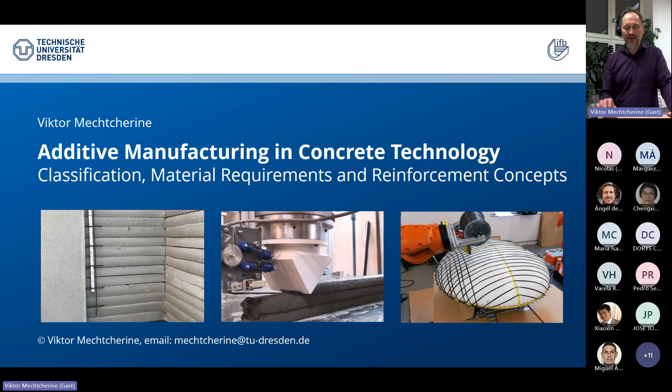Okay, let me start first with a motivation. What is behind this very dynamic development in the field? What are the driving forces? Often people start with geometrical freedom, which is, of course, interesting for architects in the first place, but also for the users if you want to go for some interesting geometrical forms.

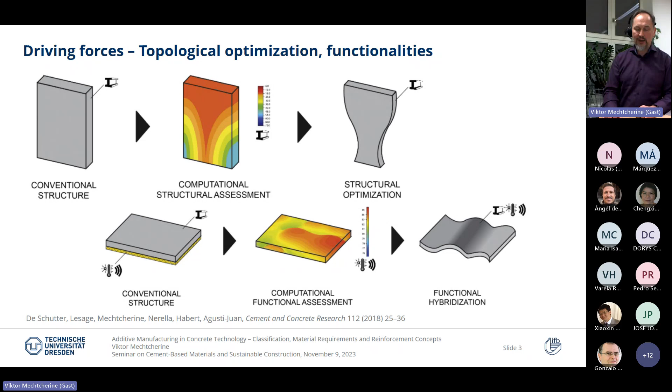On the other hand, we can use this topological freedom for topological optimization and also introducing new functionality. So basically, we attain the same performance with less material. This can be interesting from the point of view of structural behavior, but also with respect to construction physics and similar. So the next point is still about functionality and topological optimization.

The next point I want to emphasize a little bit more is productivity. Today we have a situation where productivity in construction is stagnating over decades already. And against the background of decreasing availability of skilled labor, it's quite a disaster. Here, introducing automation and digitalization, we can solve the problem for sure.

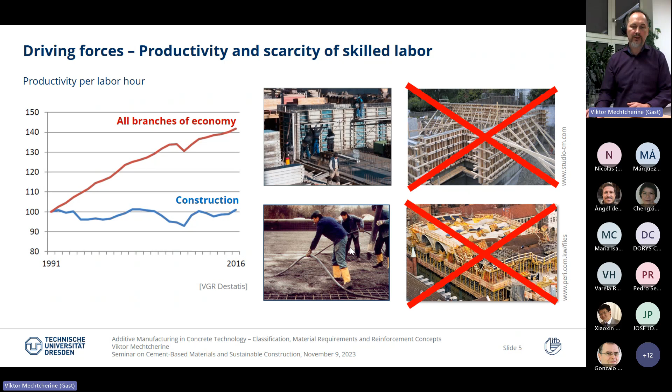What you see here are also examples of manual work. Talking about manual work, the erection of the formwork is one of the pretty laborious processes, but it's also about the use of material and, to some extent, the disposal of this formwork after use. This is what we can avoid if we go for digital construction using 3D printing and similar technology.

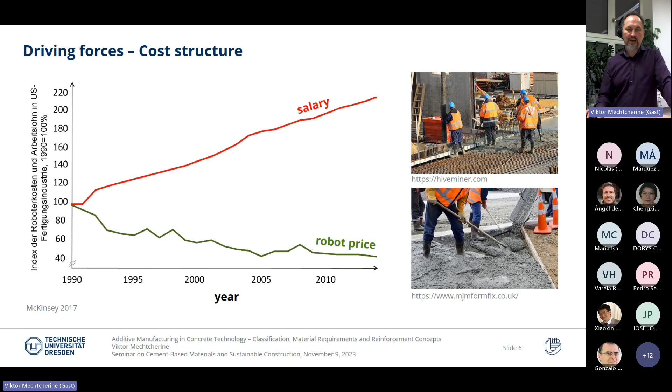And the final point here is the cost structure. So the salaries tend to increase over time, while the price for robots is decreasing. So it seems that using robots in construction becomes more and more interesting.

Finally, I want to address the situation with the data flow. What we already have as state of the art is a pretty wide use of digital planning tools like CAD and BIM, so that we have really a lot of data available from the planning process. It would be, of course, great progress to put this data directly into the production and fabrication of the structural members and structures.

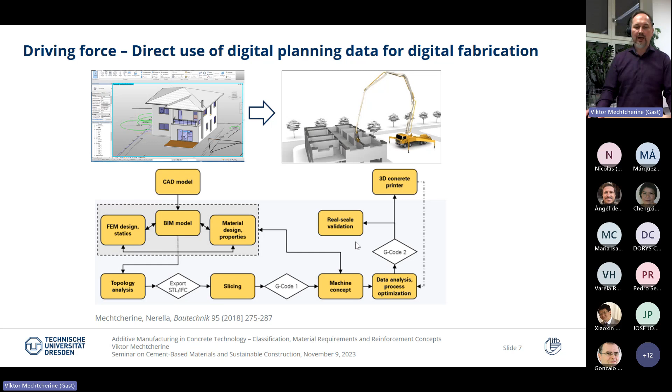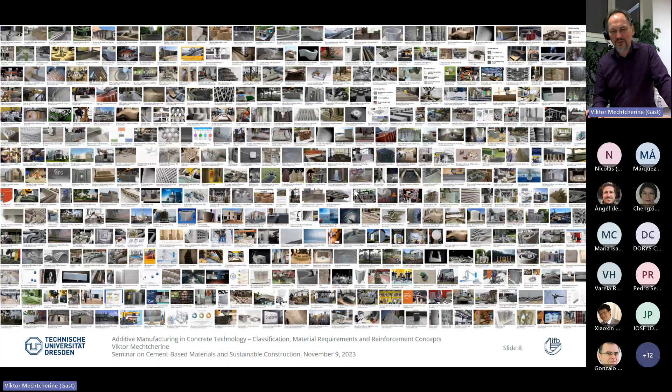Over the last couple of years, we experienced really dramatic progress in this field. You shouldn't try to read this slide, it's just an overview of what's happening across the world. It's a very fuzzy picture with quite a high challenge in how to navigate in this field.

This is why at Rilem we decided to go for some classification. This classification starts first with the definition of major operations, which can be assembly or process as such. And if we talk about additive manufacturing, this is a process.

It's a process where we shape the structural or non-structural part. And shaping can be done by different primary process classes. So what we're talking about with additive manufacturing is different from formative processes, for example casting with formwork, or subtractive processes where we produce a part and then take some material away by subtraction or milling.

So I will concentrate only on additive manufacturing, though there are also other digital processes which would be formative or subtractive. I'm talking only about additive manufacturing, which is also often called 3D printing. We have three major classes here, highlighted in blue: particle bed binding, material extrusion, and material jetting or shotcreting.

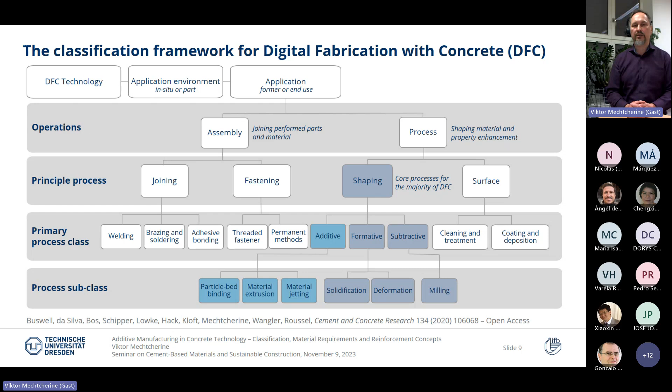All these approaches are very good and pretty mature nowadays already. However, material extrusion seems to be pretty dominant. So most of the labs and most of the companies in this business follow this process, which is why I will concentrate today on material extrusion based approaches only.

What we found in practice, however, is often this common case where we have a little bit of flow, some deformation of the filament upon deposition, but not very much. This situation cannot be described by analytical formula, but rather we would go for some numerical simulation.

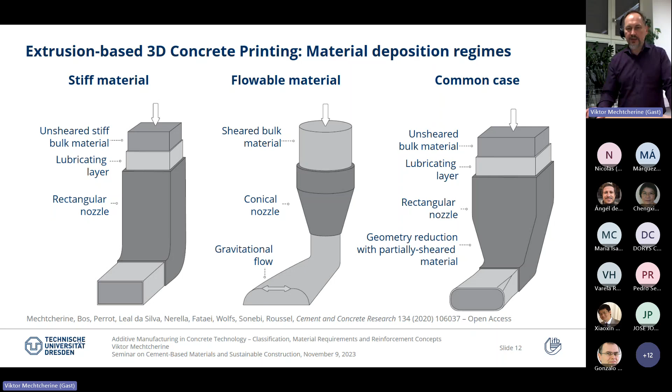It implies also that we can use very different materials. If we go to a very fine resolution and fine filaments, then we are limited to fine sand as aggregates, so basically we talk about fine mortar. It still can be called concrete, or fine-grained concrete, if it's in structural application, but basically with respect to the aggregate size, it's fine mortar.

I want to elaborate on it a little more. Going for larger filaments also means you have a quite pronounced increase in productivity, which is very important in construction. I have here a little graph which shows this quite clearly: going to larger filaments while keeping the same speed of deposition, you place much more material per time unit, and it's a quite important subject.

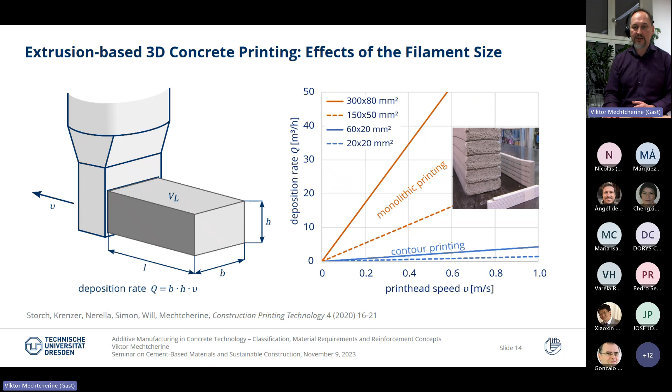And of course, using coarse aggregates and more or less regular concrete means you are very close to regular construction. It means you can stick to the existing codes also in design, maybe after some little modifications, and then all these issues with shrinkage, creep, elastic moduli, etc. are less of a problem compared to fine concrete.

So we had this thought a couple of years ago, and we developed a concept which we call CONPrint3D, or on-site monolithic 3D concrete printing. We got an award at Bauma. In a nutshell, it's about going for today's architectural and structural design, meaning sharp corners, straight geometries, massive cross sections. Nothing really very fancy, but it's kind of what is needed mostly on the market.

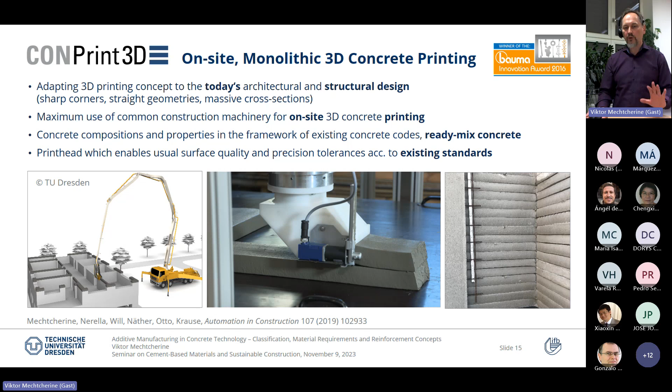Our concept also implies the maximum possible use of common construction machinery for on-site 3D concrete printing. And then we want to use ready-mix concrete, not some expensive material from the lab, but rather just order the material from the next ready-mix plant. This material should be, again, within the framework of the existing codes, then we spare a lot of trouble, using existing standards also for the quality of the work, precision tolerances, etc. It's also part of the concept.

And basically, we had a little video, which I hope will work now. Yeah, it works.

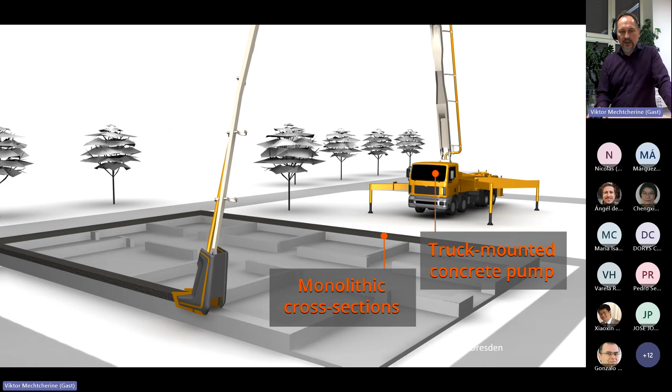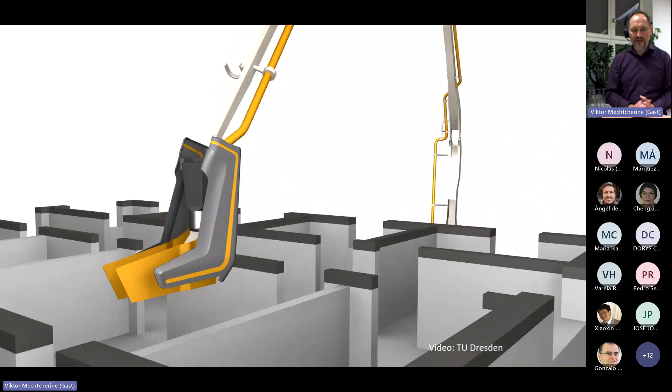Showcasing how it might be seen. We have here this mobile pump, and this mast works kind of like a robotic arm here. So this was the concept.

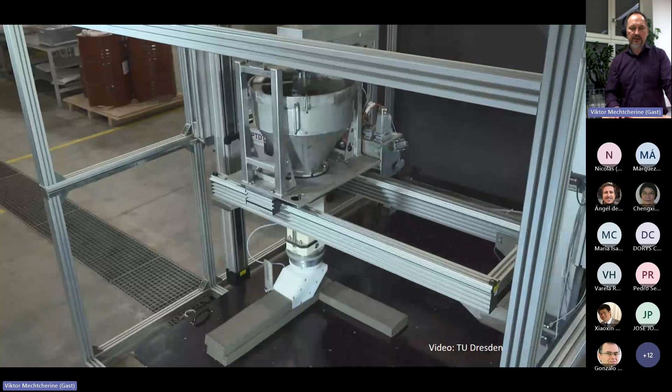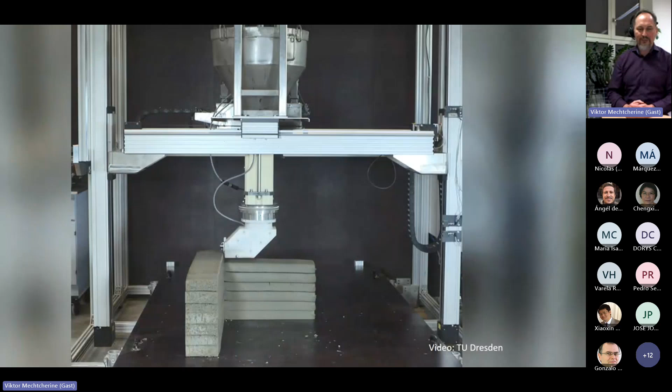We then started to implement this concept first in the lab using a gantry system to move the print head, which is pretty big in this case. In parallel, we noticed that a company here in Germany, Putzmeister, liked the concept very much. They talked to us, and based on this concept, developed a real machine, which we cannot develop in this size at the university—just too expensive. They call this machine Karlos, and they presented it just last year at the Bauma, six years after we got the award for this concept.

We were, of course, very happy that this idea came really into the practice of construction. This person, Venkatesh Nerella, was the first one to do a PhD in my group on 3D concrete printing, and logically enough, he is now with this company, pushing this technology forward.

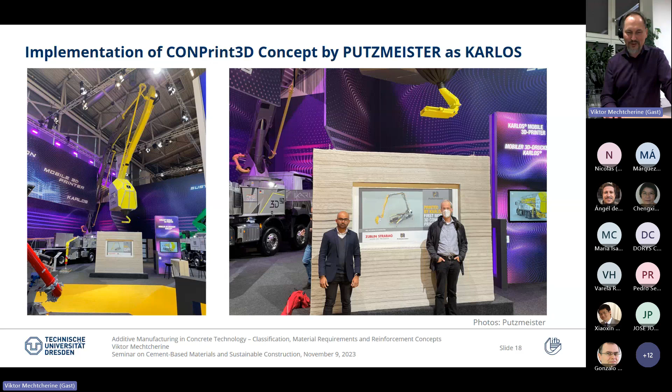I visited the site just a couple of days ago, and it's really very impressive how this machine works and has a really precise deposition of the material.

Now I want to come to a bit more detailed consideration of what we all need for establishing a technology like this. I'll stick to this large-scale 3D printing, but what I try to communicate is also valid if you work with fine filaments to a great extent—the difference is really minor, because it's always about the same principles and more or less the same approach.

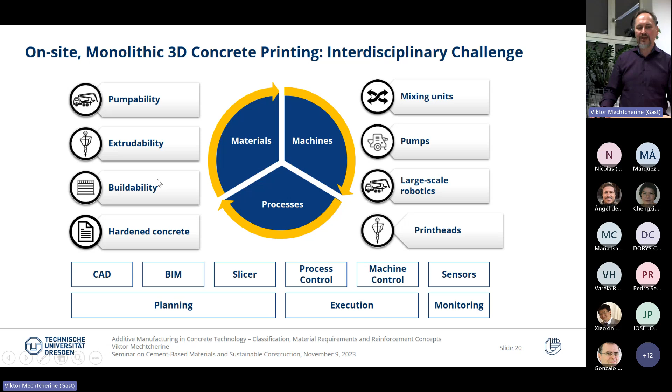So you see here the different competencies we need: materials and machines, and also steering of the processes. I will not try to cover all of this—I will stay on the left side, where I also have particular competence in materials. So it will be about pumpability, extrudability, buildability, and also properties of the hardened concrete.

This is what you see here. You first need to pump the material. Then you need to extrude the material—meaning the material should flow out of the nozzle with a particular speed and have a particular shape after it leaves the nozzle. Then you should be able to place more material on top of the deposited layer. We call this buildability—the ability of the material to carry this additional load from the upper layers without too much deformation.

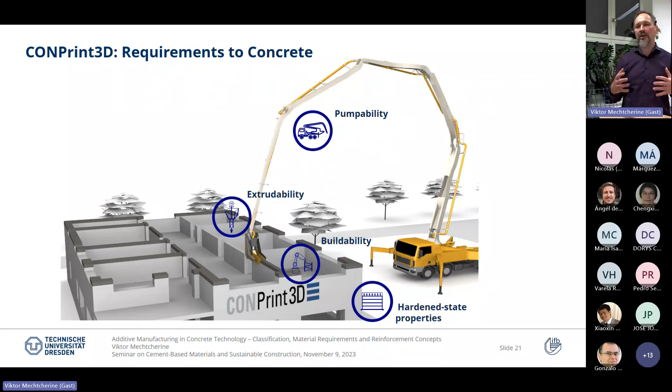And then finally, of course, we also need the properties of the hardened concrete, which we consider in the design. Basically, buildability and hardened concrete properties represent a smooth transition from hardening concrete to really hardened concrete. So we have more than just one stage for structural design—we should also design for the buildability, or for this stage of the production.

Good, so let me go through these particular steps. So, pumpability—actually we know pretty well how it works, but still pumpability needs attention. You should consider that it's mostly about the heterogeneous nature of concrete. So the concrete is heterogeneous.

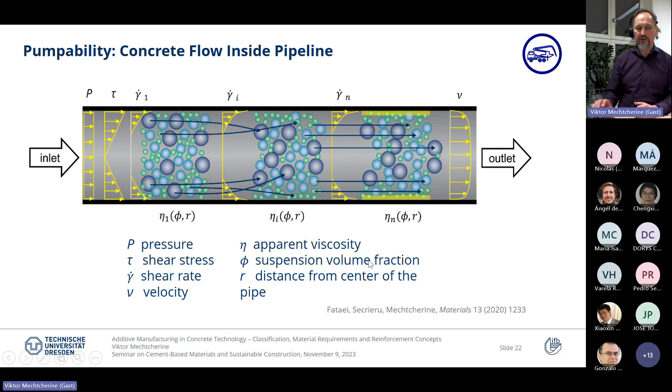Nicola explained this very nicely. In this case, moving concrete through the pipe leads to some segregation—we have formation of a lubricating layer in the vicinity of the wall. This means that this region, which is mostly sheared, also defines the movement of concrete within the pipe. So to describe this movement, we need to know the properties of this lubricating layer in the first place. It's not so much about the rheology of concrete as such, but rather about the rheology of the lubricating layer.

We developed a technique to assess this situation. It's not a usual rheometer—it's a so-called SLIPER, a sliding pipe rheometer, which mimics the behavior of concrete in the pipe.

So basically it's a piece of pipe which moves, and concrete actually doesn't change position in space, but it kind of also moves relative to the pipe. So technically it's the pipe which moves, but for the concrete it's like it moves through the pipe. The situation is similar, and what you measure here is actually the resistance to this movement.

There's some sensor placed at the bottom of the concrete column, and you measure the speed with which the pipe is moving. You can change the speed by attaching more and more weights to the pipe. So basically what you get is a relationship similar to what Nicola showed in his presentation.

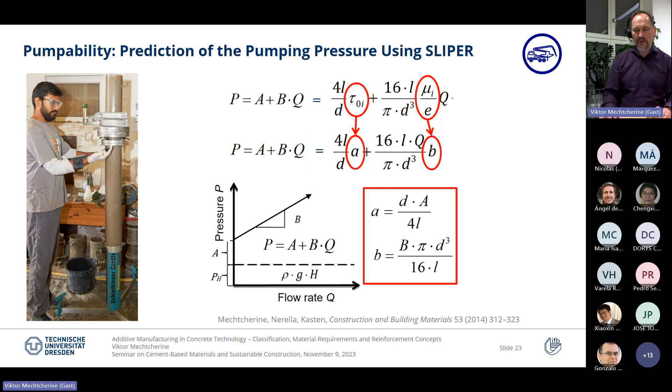The next point is extrusion, extrudability as a property. Since we work usually with screw extruders, I will concentrate on this. It's really not easy to predict what happens in the extruder. We do not have an analytical formula for this kind of relationship - what force is needed to move this complex material in the screw extruder.

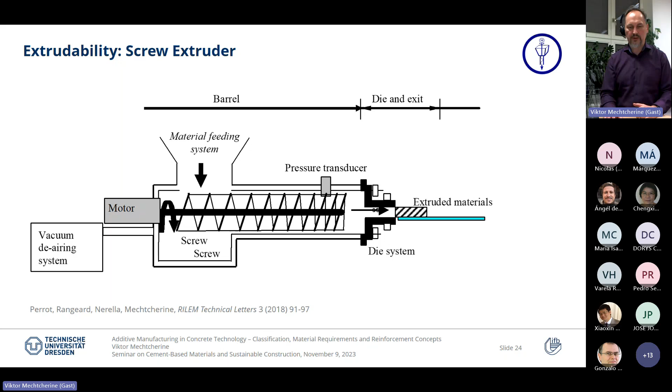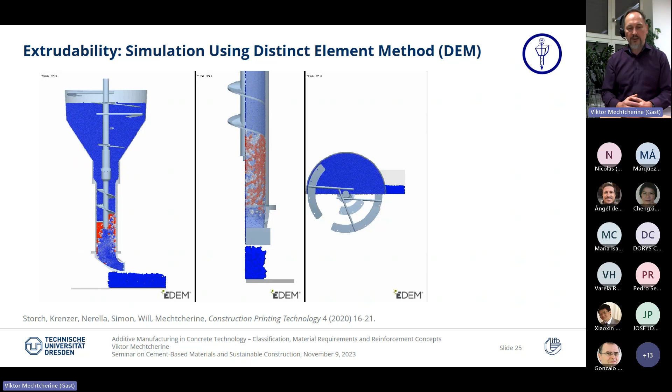What we can also see is that we get some impression of how this tool we use in the printhead to deliver the material actually interacts with the material. This is a very good, feasible approach, also to improve the designs of the printheads and other equipment needed for 3D printing.

Here also a little demonstration that we can simulate how well the deposition rate of the material is coupled with the movement of the print head. On the right hand, it seems to be a good coupling, and the other two examples - too fast, too slow - don't bring a good result.

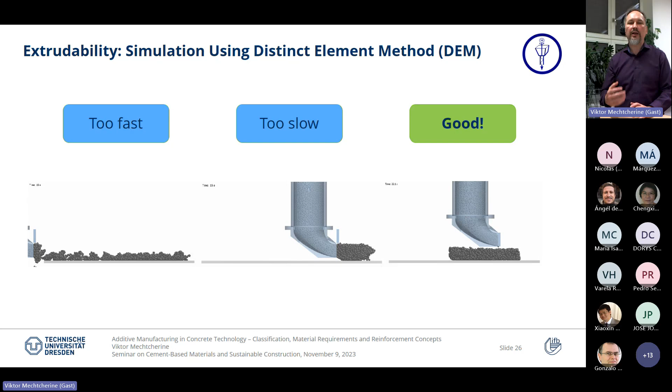This is really important - that you always adjust the movement of the print head, which is performed by some operating machine. It can be a gantry system, a robotic arm, or whatever else, with the delivery rate of the material. Then extrudability as such.

First we are interested in the quantity of the material which is delivered, and the best way to measure it is just to print some material, not produce an actual structure, but rather print it on a scale, and then you have the quantity of material per time which is delivered.

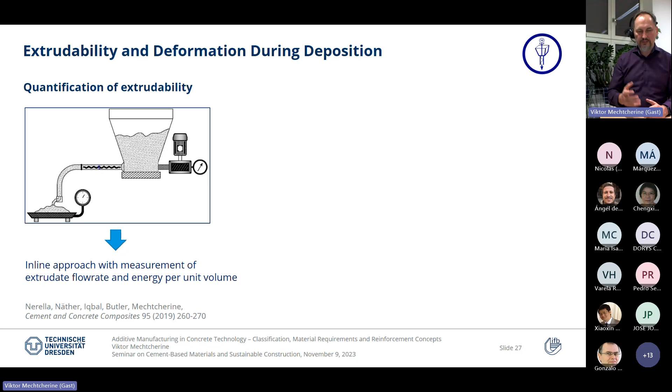Of course, you can also measure geometry, and with assuming some specific weight of the material, you can come to the same result. On the other hand, you are interested in the geometry of the filament after deposition.

Basically, as long as the yield stress of the material - a dynamic yield stress in this case - after deposition is higher than the density multiplied by the acceleration of gravity and the height of the deposited layer, then you will have no deformation. In any other case, you will have deformation of the material.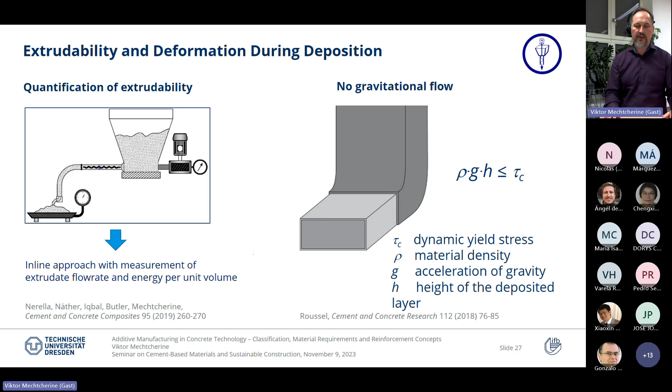If we have deformation of the material, either it's very flowable, and you can use an analytical formula, or it's not very flowable but also not very stiff, and then it should be a numerical analysis if you're interested in predicting the shape of the layer, which is interesting in many instances. I will not address this.

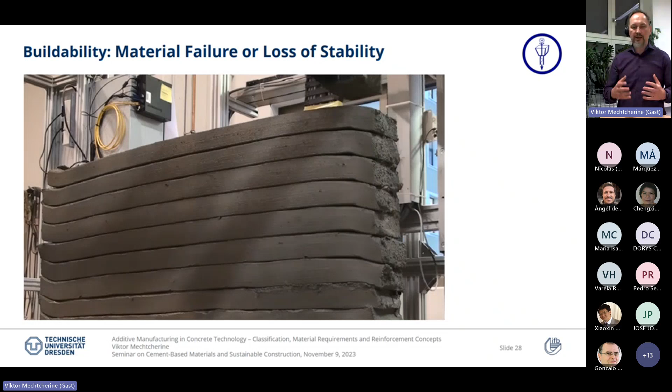I will go to buildability. Buildability, I repeat myself, is the capacity of the material to carry the load of the upper layers coming as we progress. And this is what we do in the lab.

We wait till this all fails, and you see a little bit surprised expression on the face of my colleague. Well, he shouldn't be surprised, because we actually printed on purpose until we reached this ultimate state, the failure, and then from this measurement we can test if our prediction of buildability is valid or not. So we need this kind of experiment where we have failure.

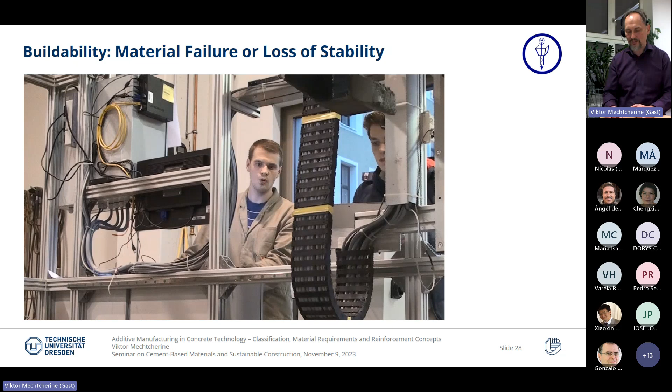So in this case, material failure is due to flow of the material in the first one or two layers. Another scenario is loss of stability, where due to elastic deformation the wall becomes higher and higher, you have stability issues. I'm really talking about elasticity, even if the material is not fully hardened but has some elastic properties, and it's decisive here. Of course, it can also be a mixture of plastic deformation plus loss of stability in addition. So here again we need to describe the material's resistance.

What would be the development of this resistance in time, because putting layer after layer, we have progress in time. So the time runs, and the material we deposited first also develops in its properties. I refer here to the previous presentation by Nicolas Roussel, who described the phenomena occurring in the material.

So basically, to describe this we use an approach like described here. It's very similar to what I showed for one filament, but in this case it's the height of the growing wall, not just of one filament, and it's also a function of time, as shown here. I hope you can see my cursor.

On the other hand, we have the initial yield stress, and then some development in time which depends on the thixotropy of the material. We can use a formula suggested by Nicolas Roussel or by Perrot, depending on which time interval is of interest. At the beginning, this development in time is pretty linear.

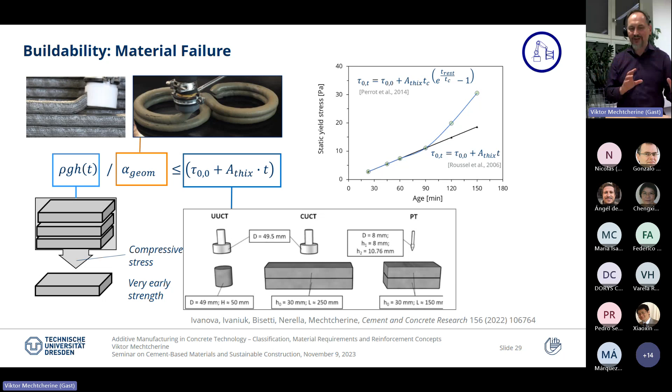To derive these properties we need a robust approach. You can try a rotational rheometer method, but not in the usual regime—really start very slowly to capture the quasi-static properties of the material. Or you can go for a penetration test or uniaxial compression test, again on fresh material, so it's a compression test performed on fresh material.

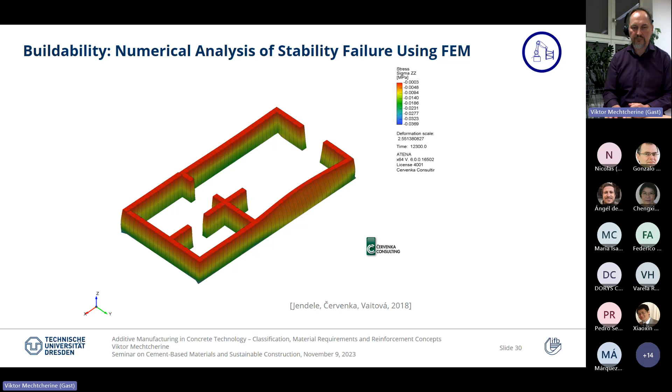When you have a more complex geometry than just a simple wall, for which analytical formulas are good enough, then numerical analysis is a good choice. In this case, finite element method is quite a good choice.

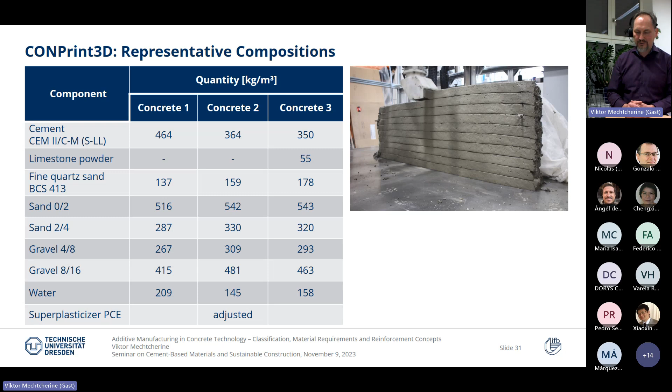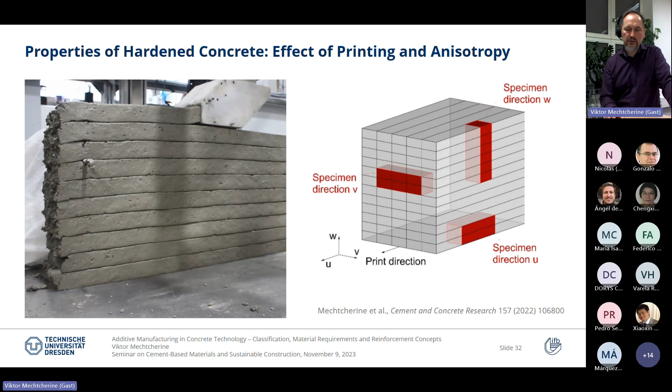After producing some walls, we also want to test the properties. I want to emphasize that due to this layered structure, the properties will not be the same in all directions. This is why we need to take specimens in different directions, and also test them in different directions, and we see here some effect of this direction.

We have the cast specimen on the left as a reference, and you see that specifically if you test flexural strength or tension, applying the force perpendicular to the joints will result in slightly, or sometimes considerably, lower values of strength compared to loading parallel to these layers.

Okay, if I still have a couple of minutes, I would like to present a concept, or rather an overview of concepts for using reinforcement. Gonzalo, please stop me when I reach my time limit. I can stop anytime. Good.

Reinforcement is very important, and again we put our heads together in a RILEM committee on 3D printing and developed this scheme. We recognized that the key criteria for sorting all available and future methods into some categories is the time of reinforcement integration.

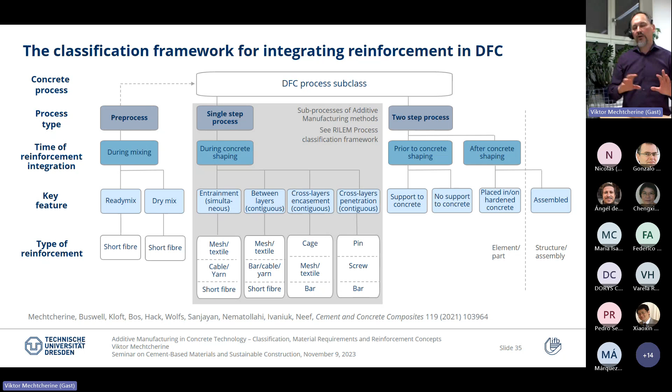Then we have a two-step process. These four were a one-step process where the concrete is still in a fresh state and we process the reinforcement in parallel or simultaneously. If we separate production of concrete and reinforcement, we call it a two-step process. Then we have two options: we put reinforcement prior to concrete shaping, or after concrete shaping. I will show you an example for all these approaches.

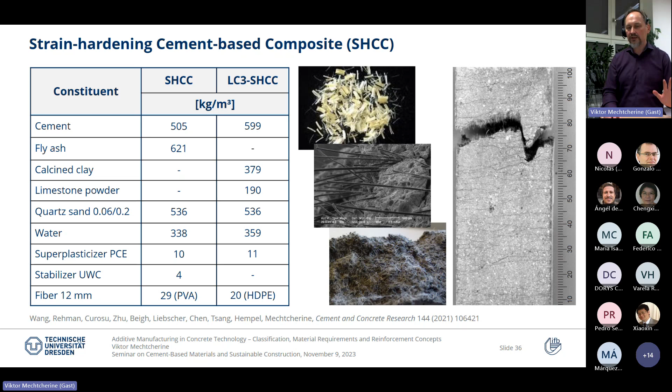I will start with short fiber. Nowadays we have really good options to produce strain hardening materials, which means they are really good for structural design. You need to use specific fiber to achieve that, and the matrix composition is also a bit specific. It's called SHCC. It's not a new concept as such, but what is relatively new is the use of these materials in 3D printing.

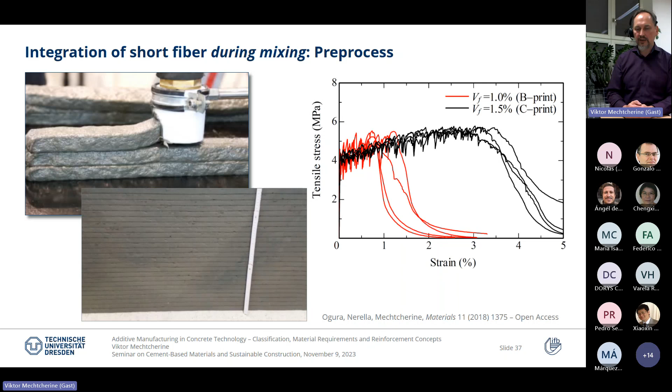We started this work a couple of years ago, and the first publication was by our guest from Japan, who spent one year in our lab, together with ourselves. Then, back home, Dr. Ogura, after rejoining his company, indeed implemented this technology.

What you see here is production of an integrated formwork, made without any further reinforcement other than short fiber. The benefit is you can transport these pieces, which are pretty filigree and have very thin walls.

You can transport them to the construction site, you can mount them, and there are no issues, no danger of cracking or falling apart during mounting. No problem. They can also carry quite high loads from the flowable concrete filled in here, actual self-compacting concrete. And also good news, it's a really protective skin, very well protective material, because it's really crack resistant.

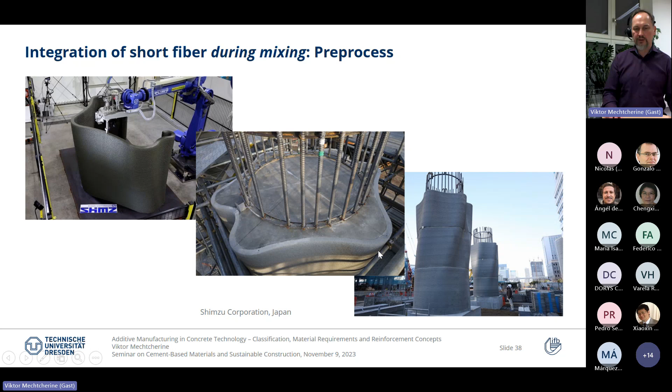It's very tough, and you see you combine here nice geometry, which is also of structural importance, with advanced technology. We use this approach also for producing some fancy shells made of these kinds of panels, or rather elements which are flat. So it's all linear geometry, but by putting these elements together you can produce all kinds of curvatures.

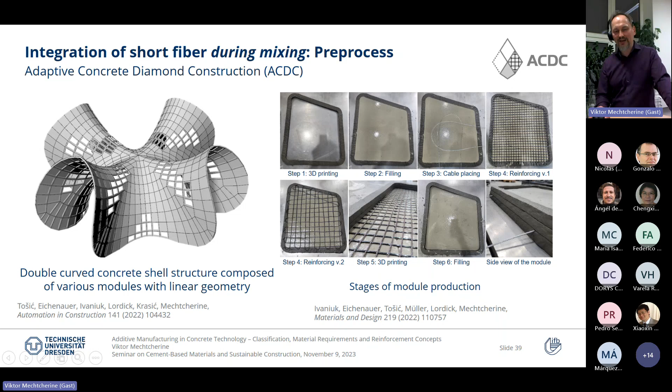This is a multi-step process. We first print the edge, then we fill in some flowable concrete, put in some reinforcement, either textile which is already ready-made, or we deposit the yarns and produce textile in situ, and then some steps can be repeated until we complete the production of these elements.

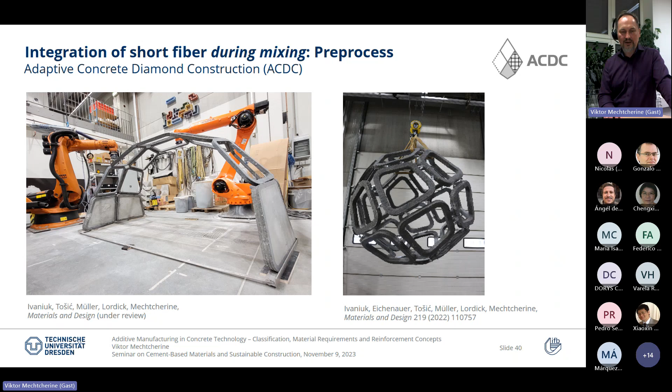So we have one or two demonstrators to show already, and this is ongoing work. Some publications are submitted and you can read them soon enough.

Now I come to placing reinforcement prior to concrete shaping. This would be a two-step process. The concept we suggested for steel reinforcement is: first a cage of reinforcement is placed, then in the middle you have a very thin mesh just to control the material flow, and then you deposit layer after layer from one side and then from the other side.

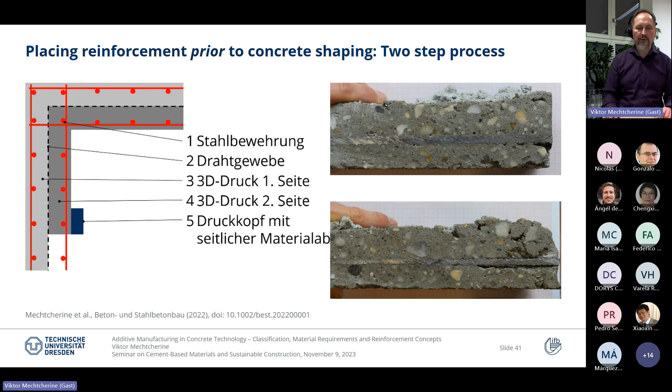We tested this approach in the lab, so it seems to work. It's not always great, specifically at the beginning of the printing process we have some issues enveloping the reinforcement nicely, but in general it seems to work. Another approach is also placing reinforcement prior to concrete shaping, but in this case it will support the concrete, whereas in the first example it doesn't support concrete—it stands for itself and the concrete stands for itself.

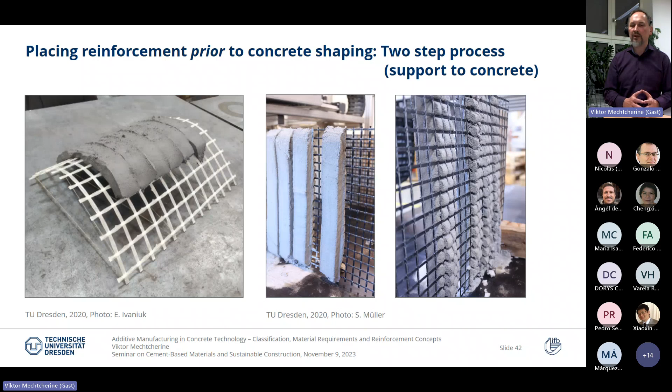Here we see a fun example of reinforcement placed vertically and shaped, and we can deposit concrete on it. In this case, the shape of concrete is really defined by the shape of the reinforcement, and this is a major distinction to the previous case.

Another concept, also a two-step process, but first concrete, then reinforcement. In this case, we first print the core of concrete without any reinforcement. But between the layers, we place pieces of metal, pieces of reinforcement. They cross the filament and help us accommodate meshes, which we just hang on them.

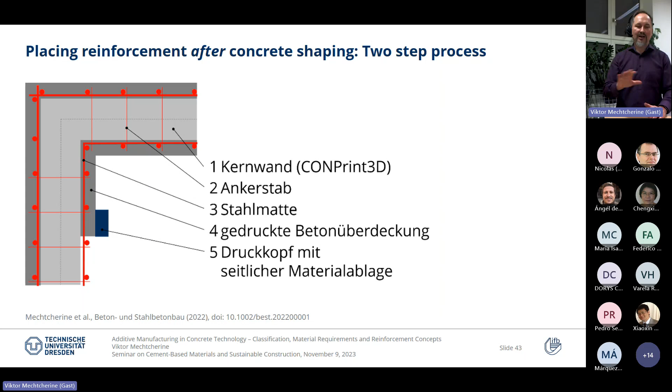Then it's more or less the same process we use in repair, when we bring strengthening or additional layers of reinforcement onto the existing structure. So again we use the print head to deposit material layer by layer, starting at the lower position and coming up step by step. So this is how it looks. Well, in this case, it was made by hand.

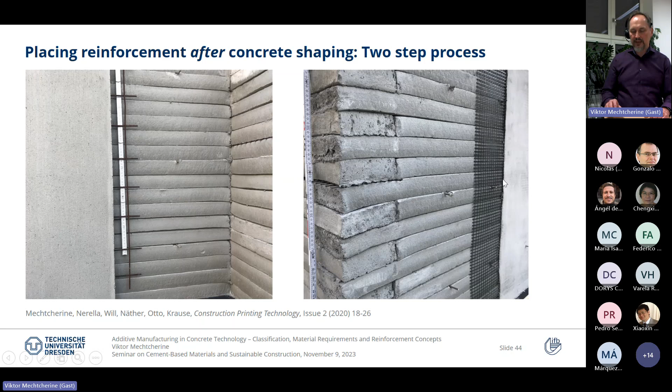But at the moment we are moving forward. We have some photographs, not looking as nice as this one, so I'll show you the better ones we achieve next time. And actually, it doesn't need to be steel reinforcement. We can also apply textile meshes or something similar.

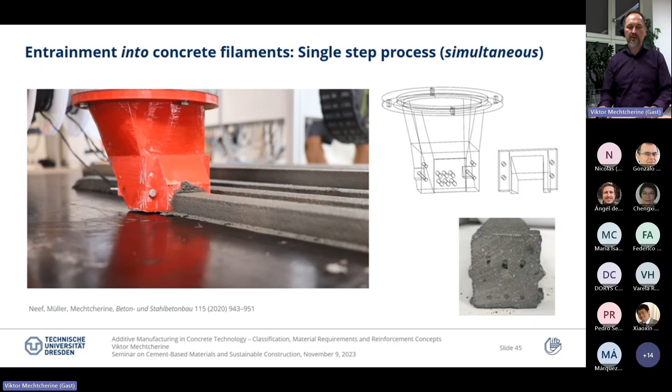Then we come one step back and talk about the most interesting scenario: single step process and simultaneous introduction or entrainment of reinforcement into concrete filaments. So we use carbon fiber and introduce it into the print head, and then it's kind of married with concrete and deposited together with concrete.

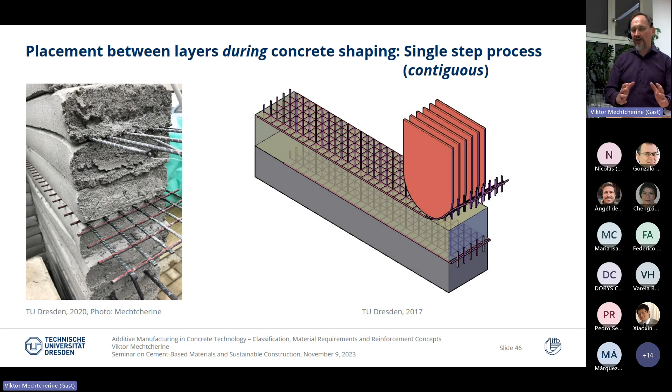An alternative is to deposit reinforcement between the layers, and here you see some examples. In one wall we tried to deposit very different materials, which is not very practical, but it shows the diversity we can go for. In this case, since it's very close in time but not simultaneous, we call it a contiguous process.

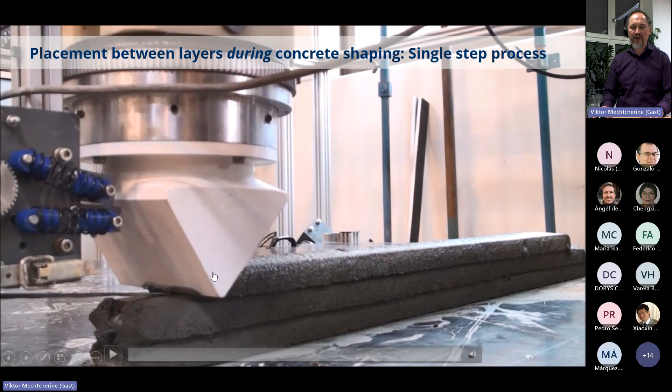So this is one example. You see the fiber is deposited and covered more or less right away by the concrete layer. Again, it's a contiguous process during concrete shaping. And this is some further ideas of what can be done.

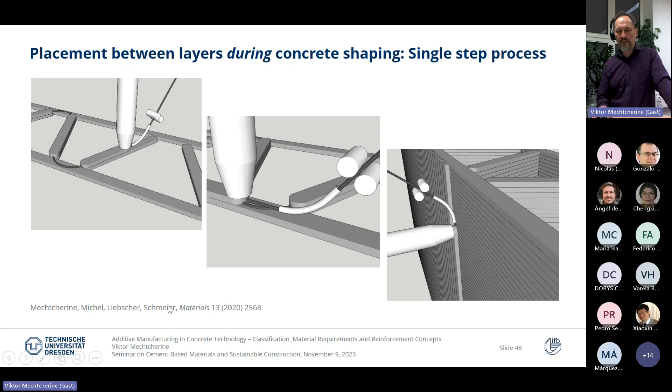We can also interrupt the process of concrete deposition to be able to connect a little bit better. I don't want to go into details, but if you're interested, we published a paper a couple of years ago on this, and now we're moving forward implementing these ideas. Here one example is shown where we implement one yarn and a very thin layer of concrete, going for fine filament printing.

Another possibility is to actually produce reinforcement and print concrete more or less at the same time. Reinforcement comes a little bit earlier, but it follows very closely the depositing process of concrete. So it's again a contiguous process. I don't have more pictures on this, so maybe next time.

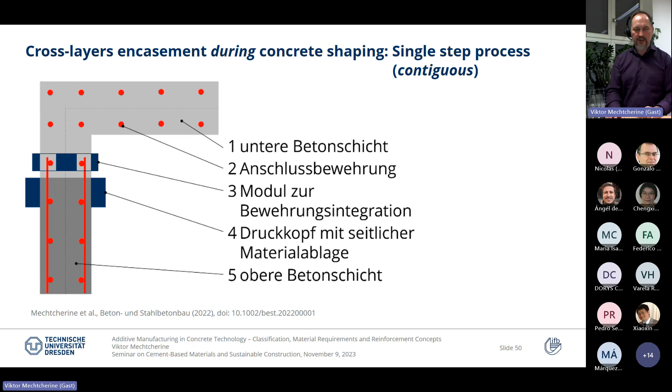Talking about reinforcement, you can also actually print reinforcement. It's expensive and a little bit slower, but a couple of years ago we showed that it works. You need to adapt the process control a little bit, but if you're careful enough, you will succeed in printing vertical and otherwise shaped pieces quite nicely.

So we also tested the properties of this kind of material, and it's actually pretty close to reinforcement we usually use in concrete construction. It's even a little bit more ductile compared to conventional reinforcement, so yield stress is a little lower, but basically we can work with these materials.

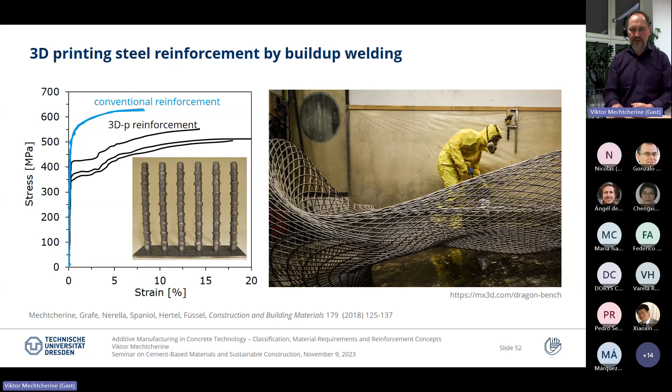So Gonzalo, if I have another 3 or 5 minutes, I would also tell a few words about implementing textile reinforcement into 3D printing. Yeah.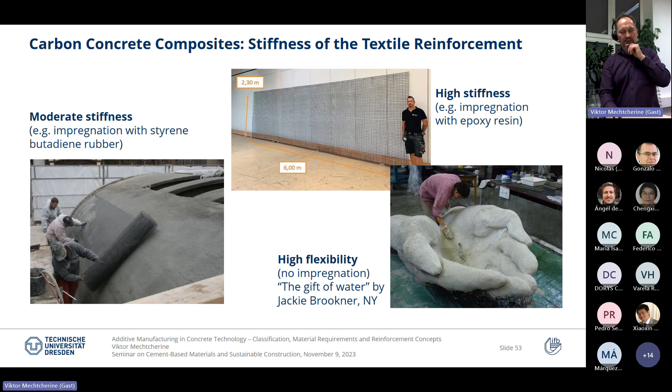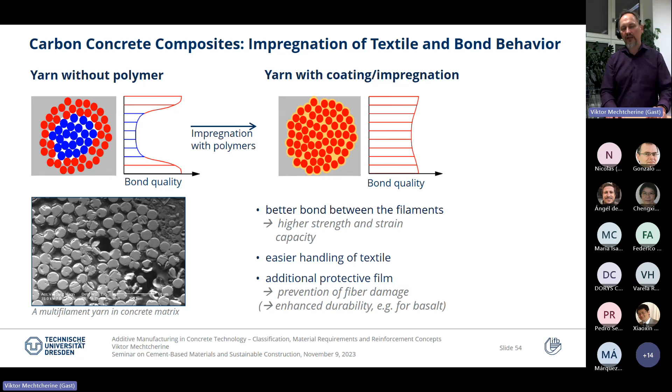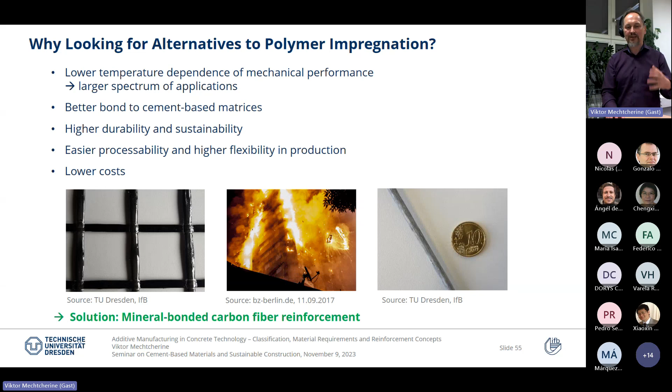So what is important when you work with fiber? It always requires some impregnation. And what we go for is impregnation not with usual polymers, what we usually have in textiles developed for construction, but in our case, because of many positive features which come with this, it's mineral impregnation. So we developed some specific techniques to impregnate the yarns with very fine suspension.

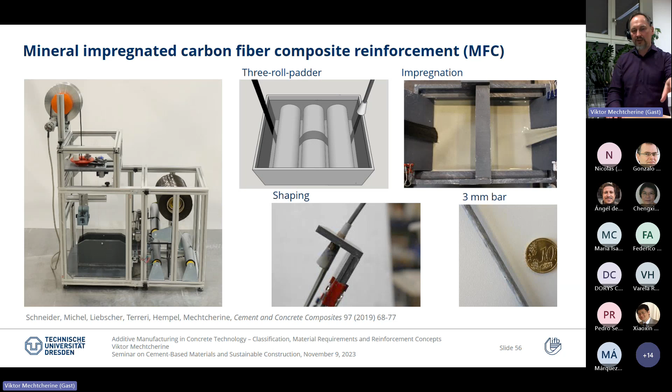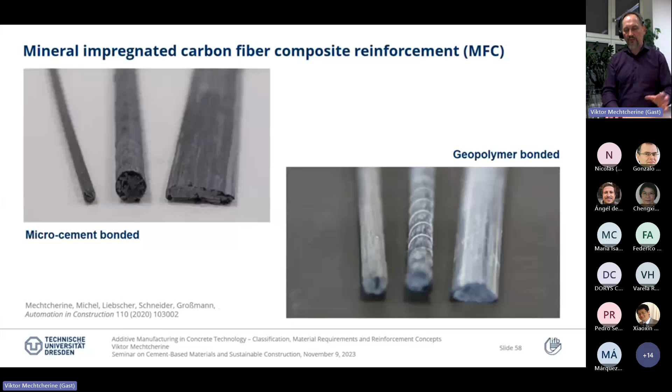You see here a mobile device we developed for that. Here you see a larger machine which actually enables us to impregnate 10 yarns at the same time and then bind them to a bar. So we can produce this kind of one-dimensional reinforcement.

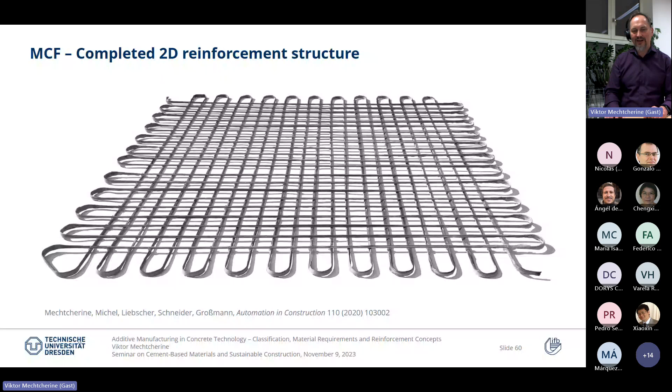We can go here for two-dimensional reinforcement. Little video here showing, and this is a mesh which looks quite similar to metal meshes. You can go out of plane to produce a reinforcement for shell structures like this.

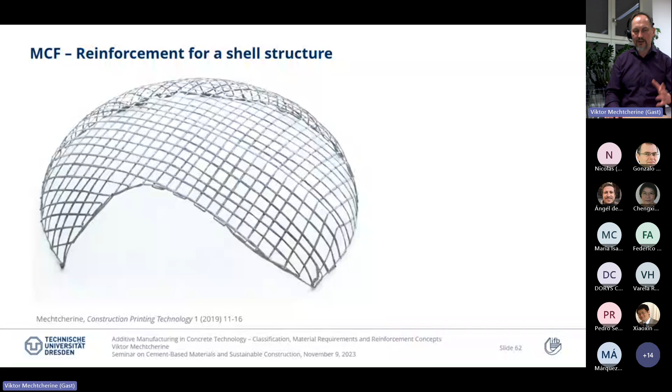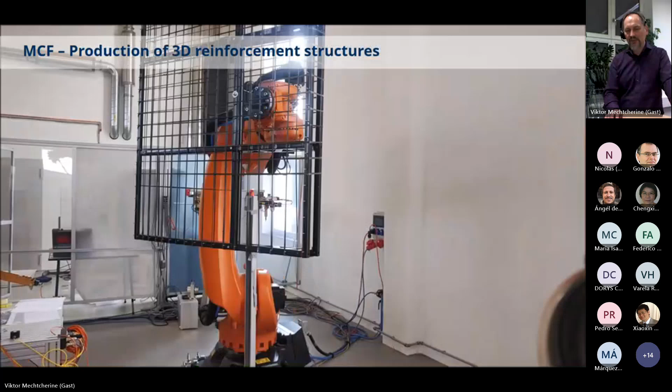And again, so we have here some final shape, and you can also place some concrete on it. You can go also for three-dimensional structures, so it's still kind of dealing with reinforcement as such. It can be married afterwards with concrete. But what is more interesting than that is actually to...

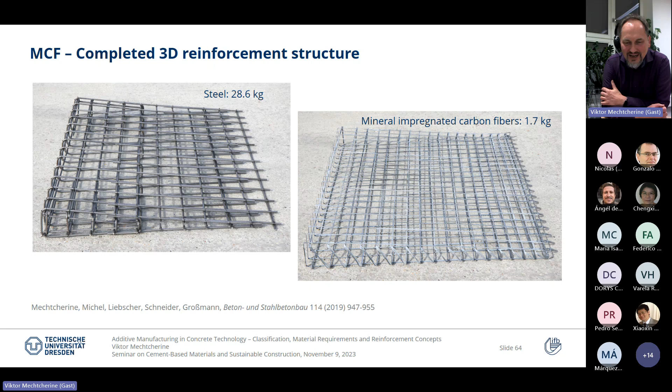Okay, I think it's in the interest of time. I deleted one or two slides too many from my previous presentation where I have the implementation of... sorry. You notice that I'm not absolutely prepared because I needed to start a little bit earlier.

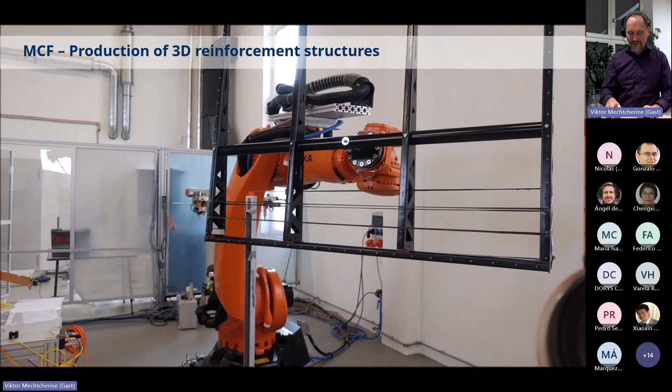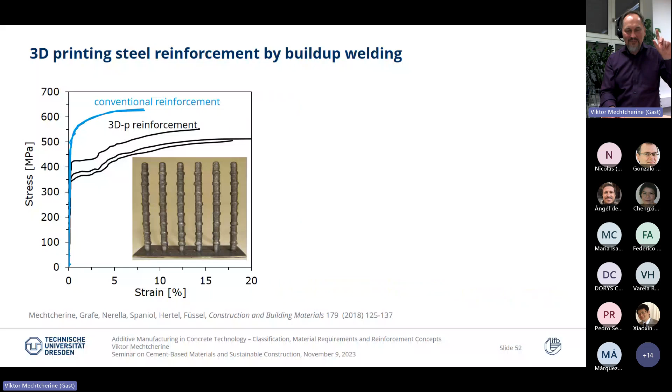You remember I showed this before. I just forgot to mention that this—let me go back a little bit—I just forgot to mention that this type of integration was with a carbon yarn which was actually impregnated with mineral suspension, right? So I haven't forgotten anything, I just forgot the sequence. Excuse me for that.

And this brings me to the conclusion. So it's a good technology. I hope that you could get a little bit of an overview of what's happening in the world and particularly in my group. Thank you so much for your attention, and I'm ready to answer your questions.

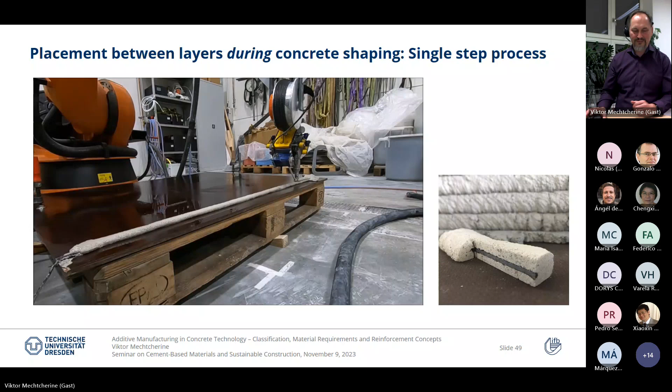Well, thanks. Thank you very much, Viktor. It was an impressive presentation, and we also appreciate very much that you were able to anticipate a little bit and give the talk earlier. Actually, I was very surprised with all the things that have to do with the reinforcement, because this is the first time I see that you are integrating reinforcement in 3D printing in such a nice way. So, are there questions in the audience?

Yes, I have one. Hello, Sabrina, Viktor—go ahead. So I've been wondering, when you print the layered walls, I assume there will be a weakness between the layers. Do you do anything special there to reinforce it, or is it enough just automatically printing layer by layer?

Yeah, okay, it's an issue indeed. So usually we have a high porosity in this joint, indeed. We have anisotropy for sure. We hardly can exclude it completely. We also have some increase in heterogeneity in comparison to cast concrete, for sure. So the question is how pronounced these issues really are. We have different approaches. If you deposit layer by layer with a time interval of just a couple of minutes, usually it's not an issue. Of course, it also depends on the rheological properties of the concrete and also the evaporation rate, etc.